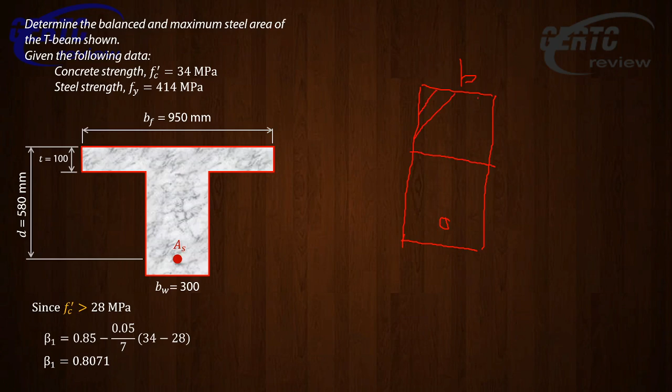Magagamit lang yung formula na yun kung rectangular talaga yung concrete mo, yung beam mo. B siya. Sorry na dun sa drawing ko, pasensyahan nyo lang. Pag rectangular yung compression block mo, magagamit mo yung formula na 0.85 Fc prime. Now, this is a T-beam. We cannot use that.

Actually, pwede sana, pero I don't think it will happen, provided your A will lie within the flange. If the balance rho is computed and then A will lie here, pwedeng gamitin yon. But I am sure with this, yung A natin, lalagpas siya, nandito na sa web. You cannot use that formula. So I hope you know that. If you don't know that, then malas. Okay, so how do we solve that?

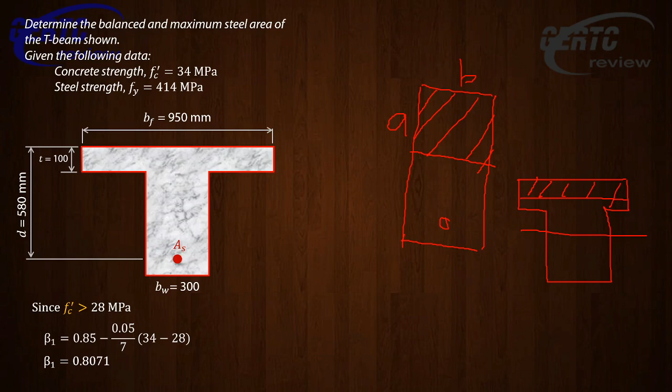So we will base it from the principle. Ano ba yung principle ng balance condition? Ang sabi doon, the stress in tension steel is just equal to Fy, just as the strain in concrete is 0.003. Actually, may formula to, pero pwede natin gamitin para hindi madagdagan yung formula na memorize natin. Let's use this formula.

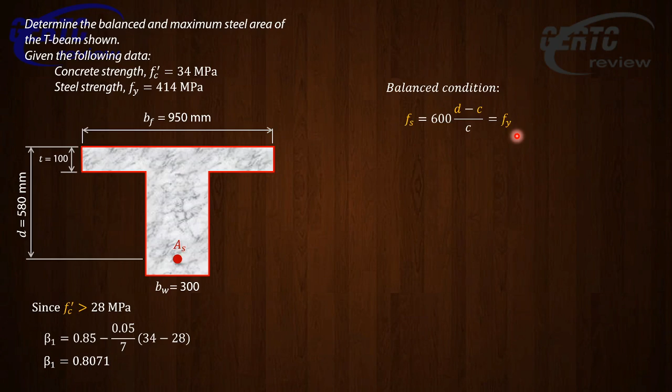Fs. Ito naman yung stress in tension steel. So, to get the balance, just equate this to Fy. Balance yan kung yung Fs mo is just equal to Fy. So your Fy is 414. Ilagay mo dyan 414, then makukuha mo yung C. That is already your C balance, 343.2.

Actually, may formula yan na hindi ko lang ginamit dito. That is 600 times D divided by 600 plus Fy. Ito yung formula ng balanced C. If you know that, then okay, magagamit mo yan.

But if you forget that, then I know you will not forget this formula, and you should not forget this formula. Kung alam mo yan, no problem, pwede mo gamitin yan. Para hindi masyado dadami yung memorize mong formula. Try nga natin to. Gamitan natin ng calculator.

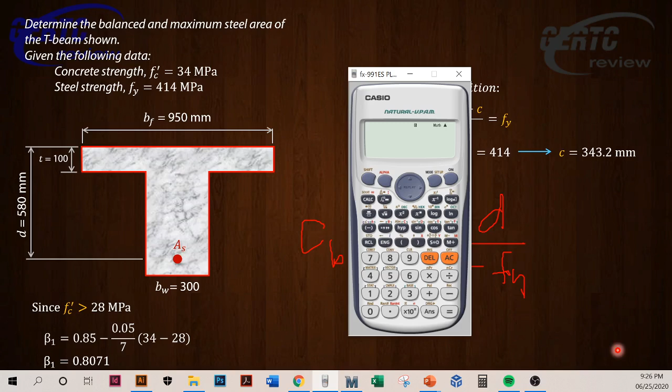Wait, let me open my emulator. 600 times d, the effective depth is 580, divided by 600 plus Fy, 414. Equals 343.2. They're just the same. So this is easy now.

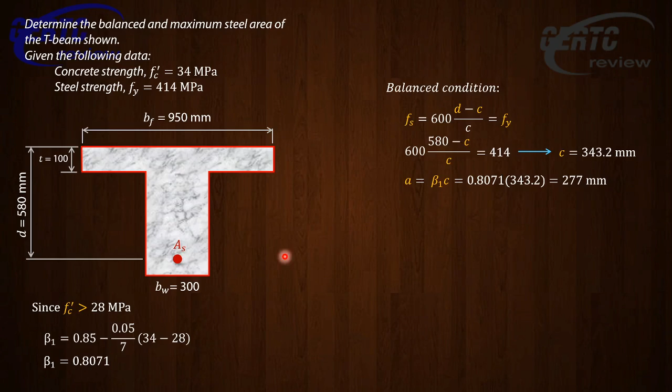Once we have the value of C, then we can now solve the value of a. The value of a is beta 1 C. Your beta 1 is 0.8071. Then our a is equal to 277 mm. So again, it's in the web. And then this is our compression block. This is our a, 277.

And of course, this overhanging flange width here will be 950 minus 300, that's 650, divided by 2, so that's 325 each. The thickness is 100. Now, what we're looking for here is just the area. Of course, at balance condition, take note that the steel yields. So we will use Fy. So this is our compressive force, and this is our tensile force in steel.

The compressive force is equal to 0.85 Fc prime times the area of this compression block, that total area. Whereas this one is As Fy, because it really yields. At balance condition, the steel yields. Take note. Of course, we are in equilibrium: compressive force equals tensile force. But by the way, let's get the area of the compression concrete. That's equal to 300 by a, 277, plus 325 times 100 times 2.

So finally, tension equals compression. Substitute, As Fy is the tension. Our compression is 0.85 Fc prime Ab. Substitute all the values, then we have the answer. Balance steel area, 10,338 square mm. Did you get that? Again, most important, you can no longer use the formula with 0.85 Fc prime. Please look at the derivation of that formula.

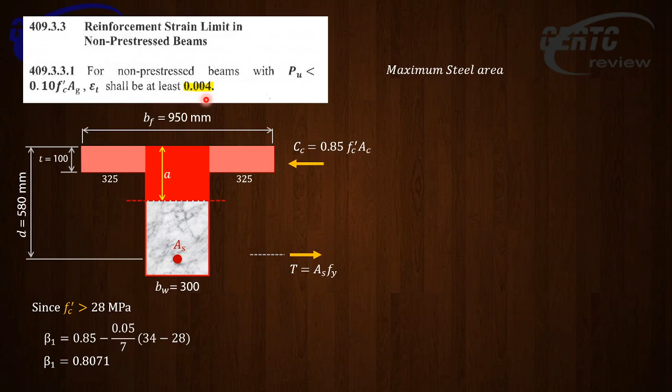It says here, for non-prestressed beams with Pu, factored axial load, less than 10% of Fc prime Ag, the tension strain εt, the strain in the extreme tension steel, shall be at least 0.004. So it means it won't go below 0.004. That's strain. Now, just so you see, this is the 2001 one. It said, for flexural members and members subject to combined flexure and compressive axial load, when the design axial load is the smaller of 0.10, they're the same.

10% Fc prime Ag or the balance Pb, the ratio of reinforcement provided shall not exceed 0.75 of the balance reinforcement. That was in 2001. But 2010 and onward, hindi na ganon. Ito na yon. In fact, hindi niya sinabing minimum. No? It is based on strain.

Now, if your E is 200,000, no? 200,000 times 0.004 is 800 MPa. So the stress corresponding to a strain of 0.004 is 800 MPa. Okay, so how will you do that? Kunin natin, gamitin natin yung stress na formula. Ito yung formula kanina, ginamit natin ito kanina sa balance, no?

Ngayon, i-set natin to E times strain of 0.004. Ito yun. That will be 800. 200,000 times 0.004 is 800. So with that, makukuha mo yung C. Ang lalabas na C dyan ay 248.6 millimeters. That is your maximum C. Okay? Actually, may formula yan.

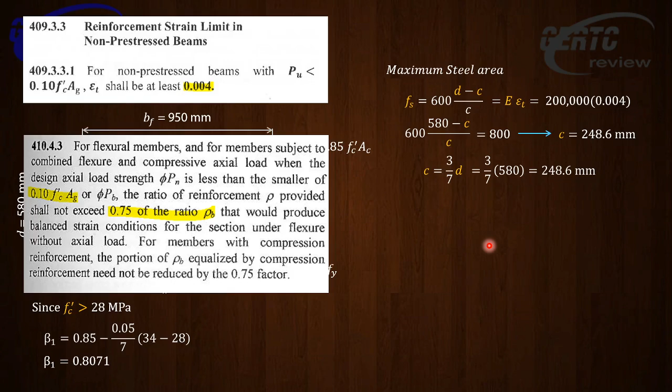Okay. Sige, tuloy tayo. So, kagaya kanina, mayroon na tayong C, then makukuha natin yung a, beta 1 C, and that is equal to 200.6, and pareho pa rin kanina. Yung a natin is more than 100. So, the same figure kanina, yung maximum steel, yung balance steel kanina. Then makukuha natin yung area: 300 times a plus 325 times 100 times 2. So the area of the compression block is 125,180.

So finally, tension equals compression. So substitute. This time, it is now As max. As max Fy is equal to 0.85 Fc prime times the area of the compression block. Substituting the values, makukuha natin yung ating As max. Ang value is 8,739 square mm. Okay? So, i-compare natin. Tingnan ko yung kanina. Okay. Ito yung kanina nakuha natin, no?

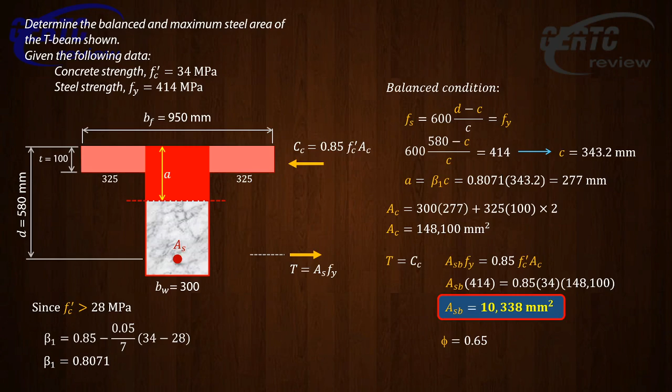So kung ginamitan mo yan ng 0.75, kasi if you're using the old code, 0.75 times 10,338, that could have been 7,753. Malayo siya. Yung nakuha natin is 8,000 plus, no? Yung sagot natin is 8,739. So, 7,753 kung ginamit natin yung 0.75. So, hindi na applicable ang 0.75, ha?

Hindi na applicable. Okay, now, tanong, ano ngayon yung reduction factor nito? Is it 0.9 or 0.65? Hindi ito 0.65, hindi ito 0.9. Kasi transition zone to. The strain is 0.004, diba? Or the stress is 800 MPa. Between Fy and 1,000 MPa, transition zone yan. So yung phi mo dito, gagamitin mo itong formula, yung pinakita ko kanina for transition zone. Ito yon.

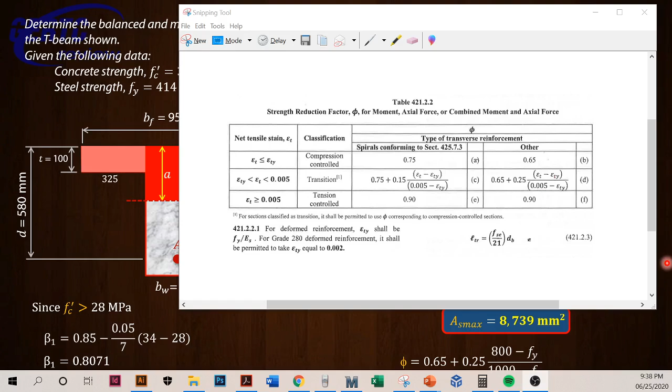Itong part na to. I hope you can see this. Pero in this formula, naka-strain siya. Ito naman yung stress in tension steel. Ito naman yung yield stress. If I will put that in terms of stress, ito will be 1,000: 0.005 times 200,000. So, ito yung magiging formula niya. 800 yung corresponding stress sa 0.004 na strain. Ang value niyan is 0.815. It's not 0.9 anymore. So, I hope you learned a lot from this lesson.